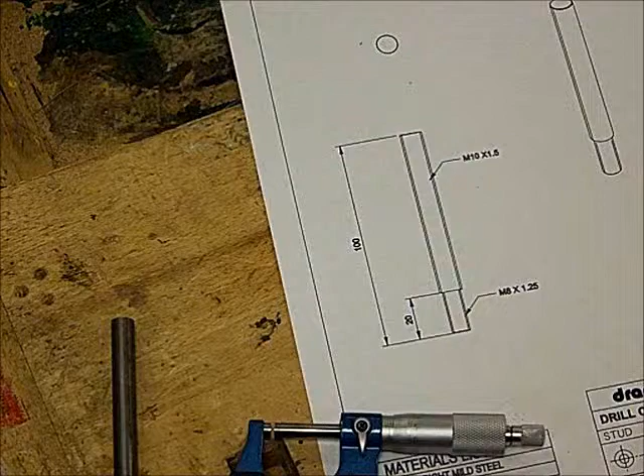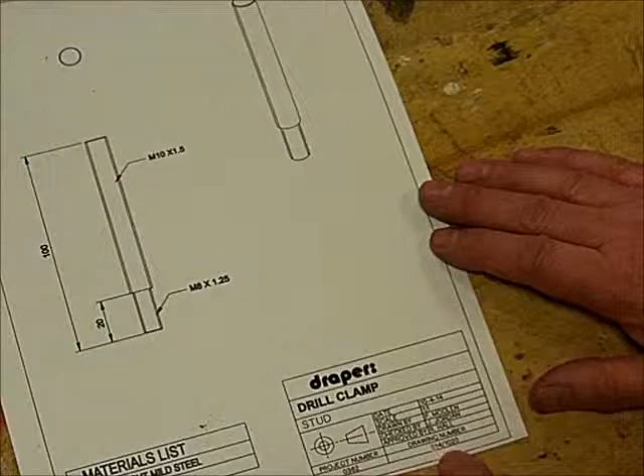So the second component that we're going to make is the stud. Right, the stud is part of the drill clamp, and in the title block it tells you that the scale is 1 to 1, which means it's full size, drawn by, checked by, approved by, and it's got the drawing number there, which is 014/1020. The material, it says, is going to be made from 10 diameter bright mild steel rod. It doesn't actually say rod, but round sections are called rod.

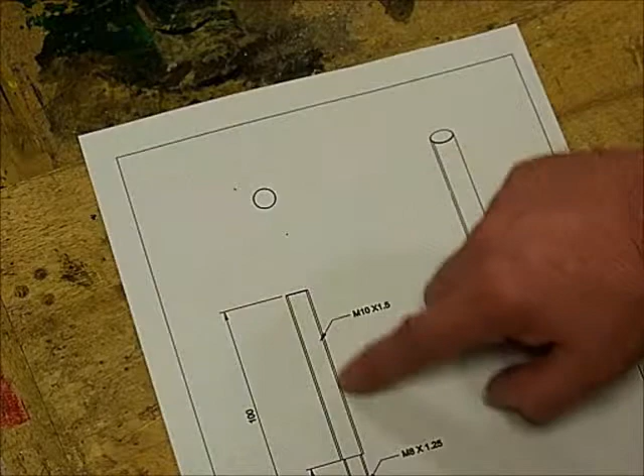So here's our piece, here's the drawing, here's our elevation, and we can see that the rod itself has got a screw thread on it. So here's the rod at the moment, it's got no screw thread on it. This part here needs a screw thread of M10 by 1.5, and the lower part is going to be M8 by 1.25, the 1.25 being the pitch of the thread.

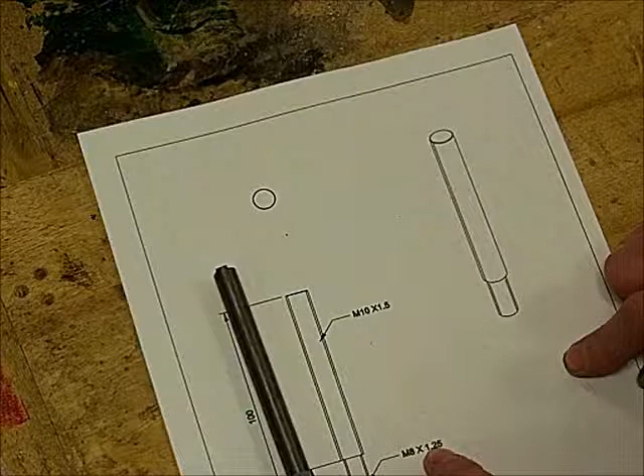Now the bar itself is 10, but on this part we can't just put a screw thread of 8mm. What we have to do is actually turn the bar down to the correct diameter. But just looking at the rest of the drawing, we can see here this is the plan view, so looking directly straight down on top of that you would see that circle. So imagine that's that view, that's that view, and this is the isometric view to give you a better three-dimensional view of what the object should look like.

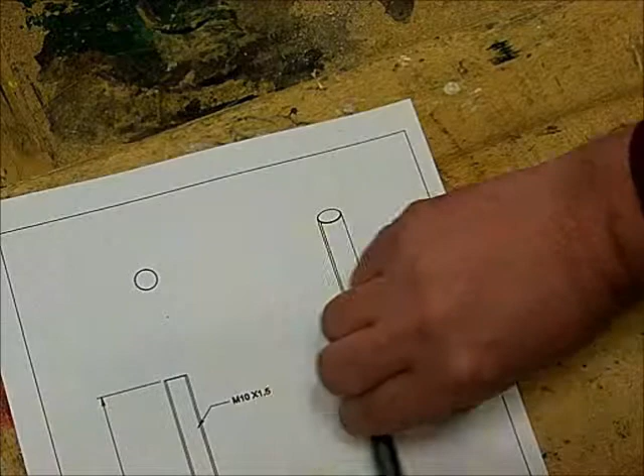Okay, so we're going to take this, and we're going to turn this part down to 8mm in diameter, and we need to do that over a length of 20mm. Notice how the sizes on the drawing, you can either read them looking from the right or from straight ahead. You'd never have the number turned right the way around, so you're looking at it from the left,

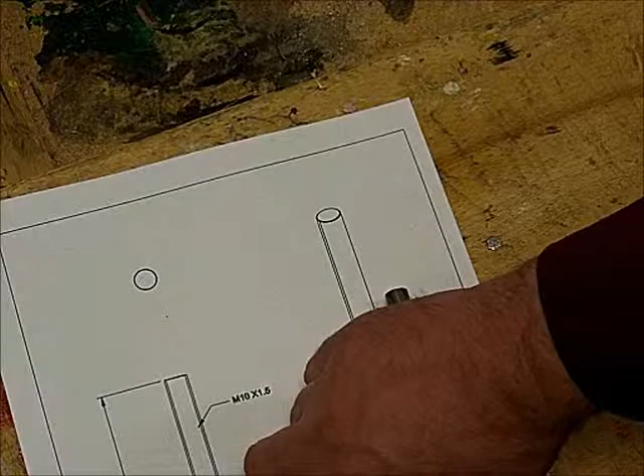and certainly never upside down. So there is a convention that we have limit lines, dimension line, thin blacked in arrowheads, the number not touching the line, just above it. That's the way it should be done. And also notice there's a little gap there between the drawing itself and the limit line. Right, it seems to have vanished there, but must have picked it up on the wrong point.

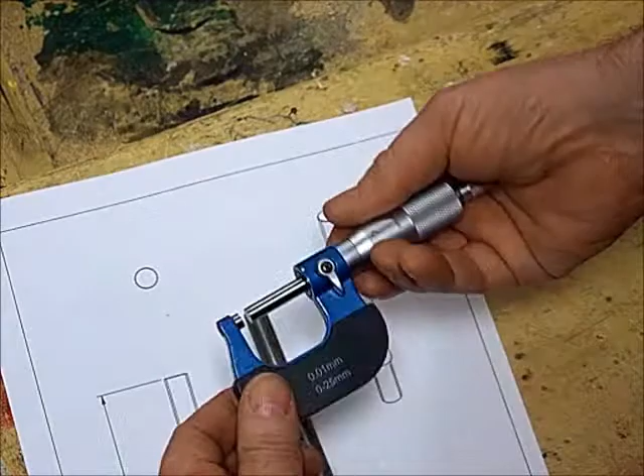So what we need to do now is take this bar. Preparation, let's just check that it is 10mm, and we can use this micrometer. Open this out. Well, the way this works is if I close that up, we can see there it's on 0 just about, and one revolution of that means that the gap here opens up by 1/2 millimeter. So 1 revolution is 1/2 millimeter.

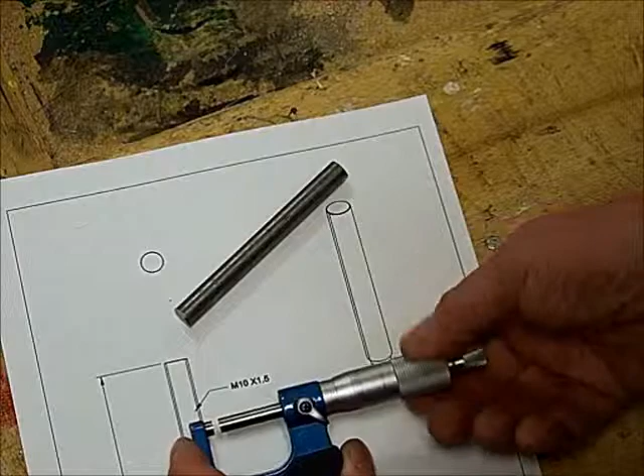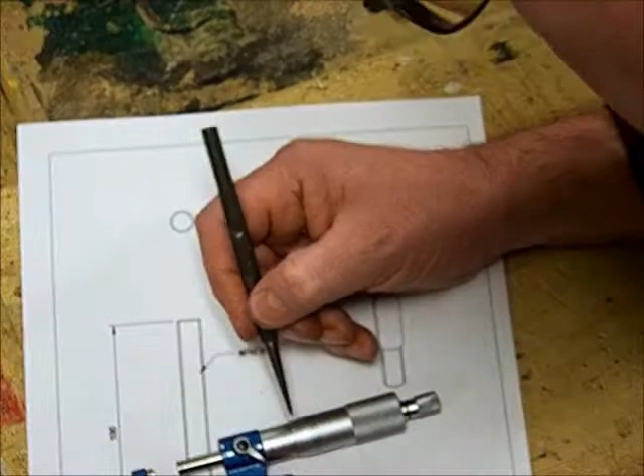So if we just wind that out all the way to approximately 10, let's take that in a little bit, and if we look carefully here, to get something to point with, we can count the millimeters on here. We've got 5, 6, 7, 8, 9, 10, and it's up to 10, and it's got 45 there. So actually, according to this, if we turn it there it would be exactly 10, but the diameter of this bar is slightly less than 10.

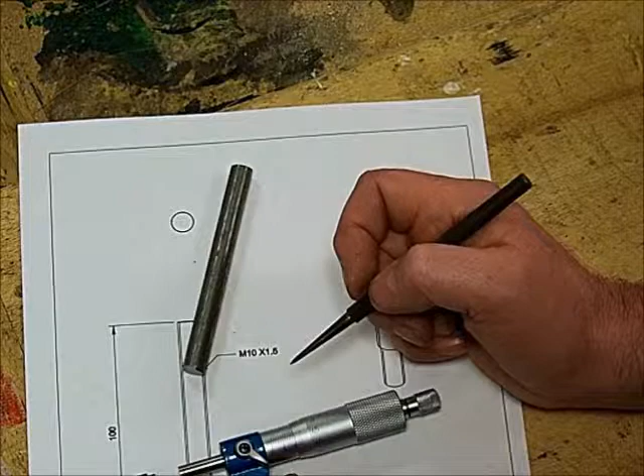So there's 50 of these divisions around this thimble, as it's called. So that means that each one of these marks is 1/100th of a millimeter. So that's 5/100ths less than 10mm, which is certainly close enough for what we're doing.